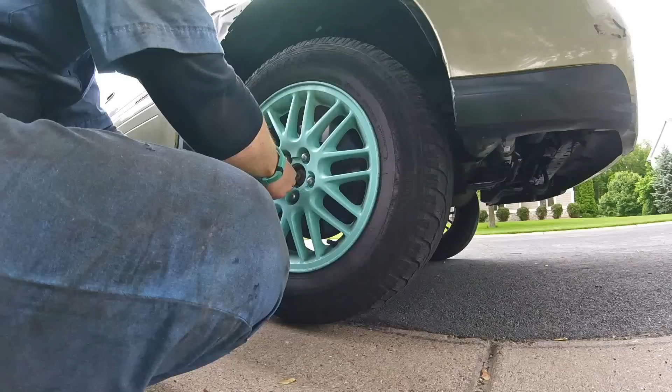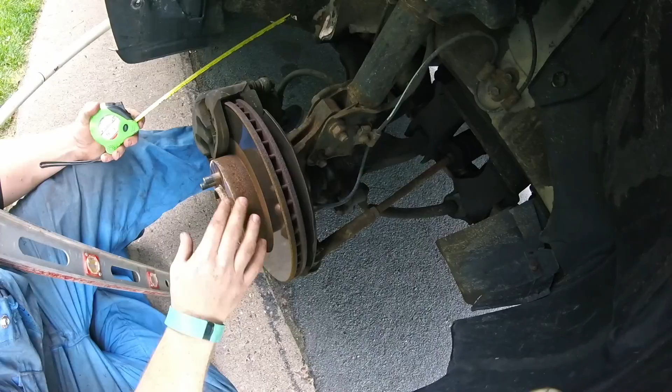Okay, so if I'm going to be running a 10-inch wide rim with 5-inch back spacing plus an inch, which is my adapter, I'm going to be at a 4-inch back spacing. Because that rim has a 6-inch back spacing, I know that I can get 6 inches on this side of my mounting point. So where the rim actually mounts to the hub and the disc rotor and everything like that.

So that's a really easy way to go about it, is to just measure the back spacing on your current setup. Now most of you probably won't have 6-inch back spacing because that's ridiculous. These tires sit so far in. I think they're only 6.5-inch wide rims. And so, yeah, maybe they're 7-inch rims, so there's an inch on this side. But basically, they're not the right rims for this model, and that's why they sit so far tucked up underneath.

The other rims have a slightly different back spacing, or offset. Offset, again, back spacing is measured from the inside, offset is measured from the outside. That's how I think of it. It's an easy way to go if you're confused about it. Partially I like back spacing better because it's in inches, so that's easier for me to get my mind around it, especially when you're talking about either an 8-inch wide rim or a 9-inch wide or a 10-inch wide rim.

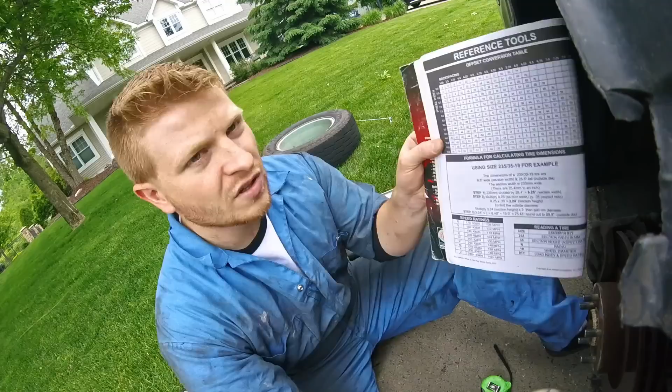So say somebody's talking about like an 18 by 10 with negative 20 offset. So on this chart, I come down to a 10-inch wide rim on the side. I come over here to about negative 20, negative 19 right here, and I come up here and it's a 4 3/4 inch back spacing. There's almost 5 inches inset towards the vehicle. So that helps me a ton, okay?

If you're American or you're using freaking inches that suck, convert to back spacing. It's a lot easier to actually get your mind around how far in the tire is going to be inside the car versus how far outside the car. The other cool thing about this booklet, it talks about speed ratings, so you actually know what the markings on your tires mean. You have a bolt pattern conversion from imperial to metric. In here it even talks about all of the different figures on a tire, so section height, section width, outside diameter, gives you examples of all of that.

And then the really valuable part for me is that this has every single size tire from 13-inch all the way up to close to 24. Yeah. So every single size tire here in the 15s, you have it listed by the tire increment, so a 155/60/15 all the way up to a 265/75/15. So that's sorted by size. And then this side is sorted by outside diameter, so the smallest one is a 195/45/15. It's 21.9 inches outside diameter. It goes all the way up to 28.

My only concern, I need to check the back, but I think it might stick out a little more than I was hoping for. Anyway, I am pretty positive it's going to fit on the front with turning and everything, and that's just because it's going to be slightly smaller. These barely rub, you can see. These ones rub right there, and that is when you are backing up at full lock. You can see both of those spaces.

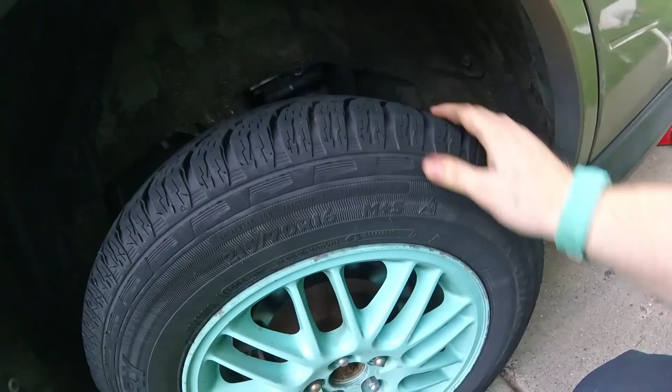Now, like I said, this tire is 28 inches outside diameter. I'm going down to a 26 inch diameter tire, so I shouldn't have an issue there. Actually I think it's going to be about the same offset on the inside. And so I'm good, I'm clear. The backs obviously are going to fit. I was going to show you how to do it on the back. The back is easier to figure out because obviously you don't have to worry about the tire turning.

This little mountain with a snowflake, that means they are snow rated. Obviously not snow tires, but they're rated for snow. They're good for snow. The compound can hold up to the cold temperatures, things like that.

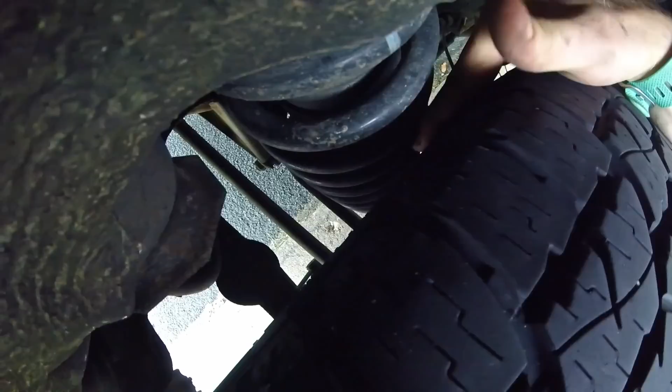Okay, yeah, back to the rears, they're a lot easier to measure. You don't have to worry about the tire turning because there's no steering in the rear on most cars. And yeah, basically it's gonna fit. Mostly I know it's gonna fit because this tire fits here and I'm not rubbing back here against the spring. Now I have, I don't even know, a 1/4 inch there, maybe an 1/8 of an inch. I can't even see it. All I know is that it's not touching.

But I'm confident that that's going to be plenty of space for some super wide rims. And the dumb thing about this is these are more offset inside underneath the car. This has, I think, 2.5 or 3 inches between the fender and right here where it mounts. So pushing this out 5 inches is going to do a huge amount for the looks of this, because my issue with this is it looks kind of goofy because it looks so skinny.

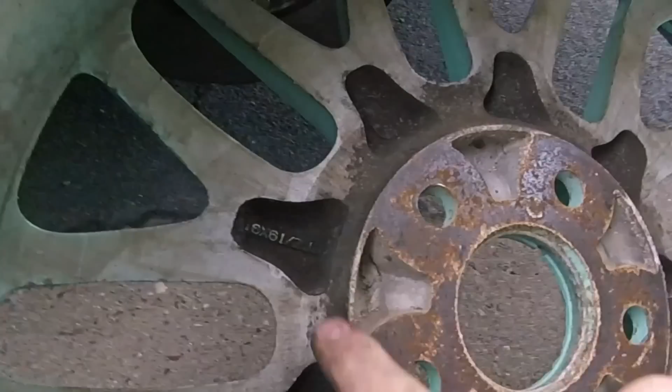But yeah, that's how to measure for offset, how to measure for new rims. So if you're curious to know what specs your rims have, all you have to do is pull the rim off and it'll tell you on the back side of it. So they have these casting marks here. So right here, it's a 16 by 6.5.

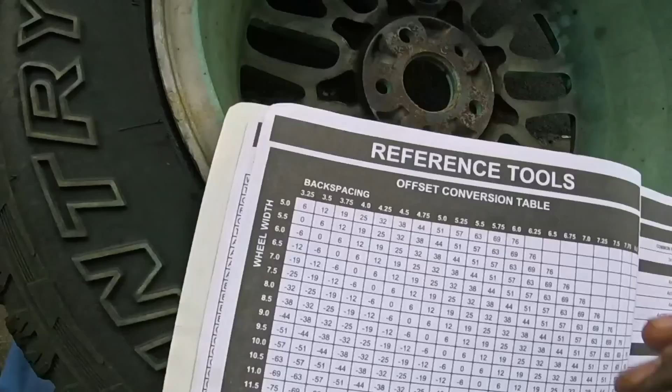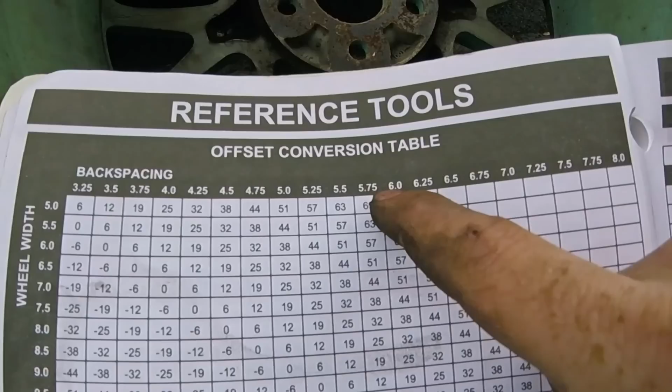This is the aluminum compound that it's made out of. It's made in the USA. 5 lug. Subaru made it. The important one is this one here and this one here. So this one here, that says 55. So this is a 55 millimeter offset.

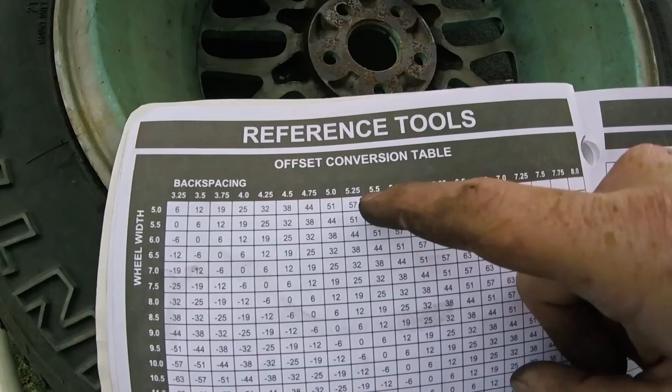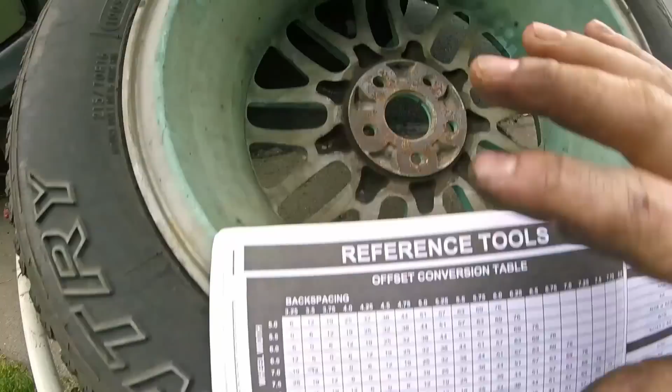So you come here and it's a 6.5 inch rim with a 55 offset, around here between these two, and I was right. It's between 5 3/4 and 6 inch backspacing. So if I have a 5.5 inch backspacing, or a 5 inch, no, it would be down to 4 inch backspacing. Anyway, I'm gonna be clear. I'm gonna be good to go.

So anyway, you can find these offset conversion tables on Google. Just search it. You can find all of this stuff online, but this is really nice because it's all in one place, and I just have to go grab my book.

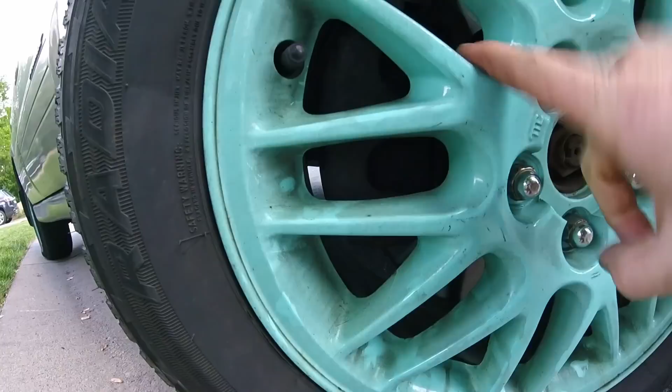So another thing to take into account when you're looking into some new rims are the brakes that you have on your car currently. Generally, it's not a huge issue, but if you have big brakes, you need to think about it. So here on my Legacy H6, I have bigger front calipers than a standard Legacy. So they're a good upgrade option, but they also can get in the way if we're talking about rims. So here you can see it's a pretty tight fit.

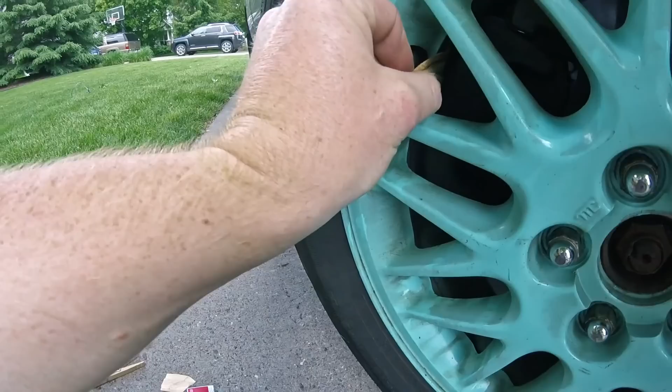This is a 16 inch rim, and so a 15 inch rim is going to be smaller, obviously. Now it's not going to be an inch smaller, it's going to be 1/2 inch smaller. So I need to find the tightest spot and see if I have 1/2 inch. Now it doesn't look like I do, which might screw my plans over, but that's what we're doing now, is measuring it.

So I got some random crap to stick in there. I want that one. So we're going to take these, and those 3 together are about as much as I can fit. I'm wondering if I can fit a little more because there's a lip here on the edge, so that might be closing it down a little bit.

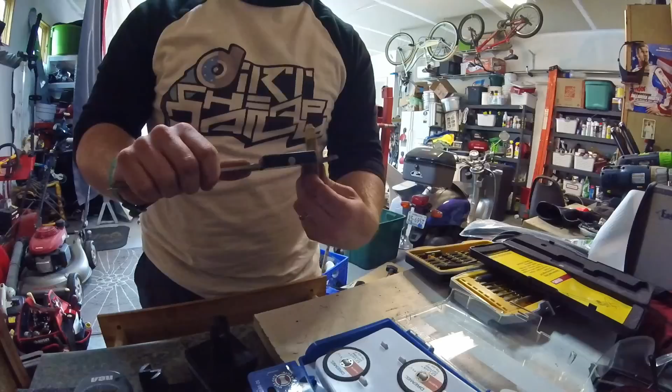So I'm more concerned because the front face is not going to have any impact because it's going to be so far over. So if I do it from the rear, those 3 are about as much as I can do. So let me pull them out and I'll go measure them and cross my fingers that I'm gonna have enough space, because I would really like to run a 15-inch.

This is telling me that I don't even have a half inch. Don't look at that because it's not working, but down here. Shoot. Well, that might have boogered my plans. But luckily, they are just plans. Luckily, I don't have my rims here. I haven't paid for them. I haven't bought tires. I haven't done any of that. That's why you do all of this stuff first, before you buy tires and rims.

Now, I can understand, obviously, if you're getting a deal on used stuff, you can jump on it before you think it all the way through and go ahead and buy it, but preferably, yeah, I only have a third of an inch, whatever that is. But, well, just means I need to do some more thinking and figuring before I put money down.